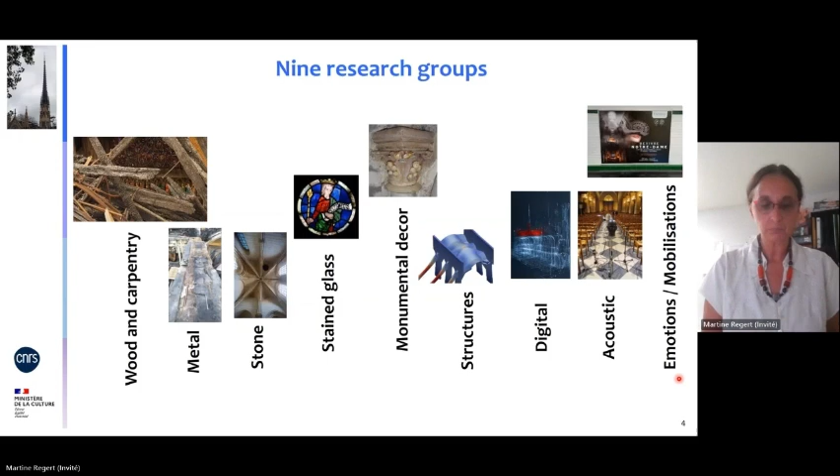After between 4 and 5 years of work, these groups have produced results that have shed light on various facets of the cathedral's history. This information was recently presented and discussed at a meeting held in Paris at the end of April.

Sorry, it's in French, but the title was Birth and Rebirth of a Cathedral, Notre-Dame de Paris, Under the Eyes of the Scientists.

We just had the information yesterday evening that this event is now available online, so you can attend the meeting online and follow the discussion and the debate and so on.

Of course, in a few minutes I could not talk of everything, but I will try to show you how the results of different working groups now converge to highlight some specific points of the cathedral, specific aspects of the cathedral. I will first talk about the chronological aspects.

Then I will deal with the supply of the different materials of the cathedral. And then I will turn to a subject that was perhaps not expected on such a cultural heritage topic: the case of information that we can gain from biological materials on environmental and climatic data. So I will highlight these 3 points in my presentation.

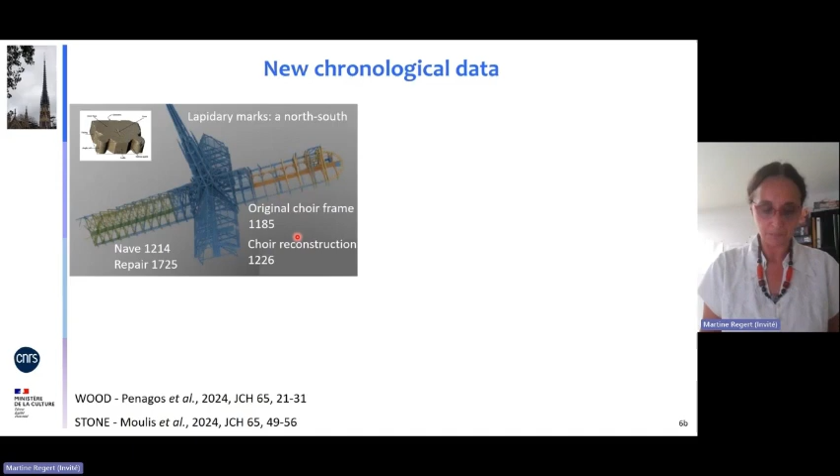The study of iron armatures or reinforcements used in the construction of the cathedral also offers a glimpse into the innovation that took place on this building site in the mid-12th century, adapting metal to create a novel architecture. Radiocarbon dating was carried out on the carved areas of some iron armatures, and they reveal that Notre-Dame is the first Gothic cathedral where iron was massively used as a proper construction material to bind stones together throughout the entire construction, leading to a better understanding of the master mason's thinking.

Even if research is still underway to establish a detailed chronology of the cathedral's construction, we can already see that data obtained on the various materials provides information on the dates and phases of construction, but also on the spatial organization of the site. Other series of wooden and metal elements are still being dated, and the study of the stained glass and monument decor, which I don't have time to detail here, will also complete this chronological overview.

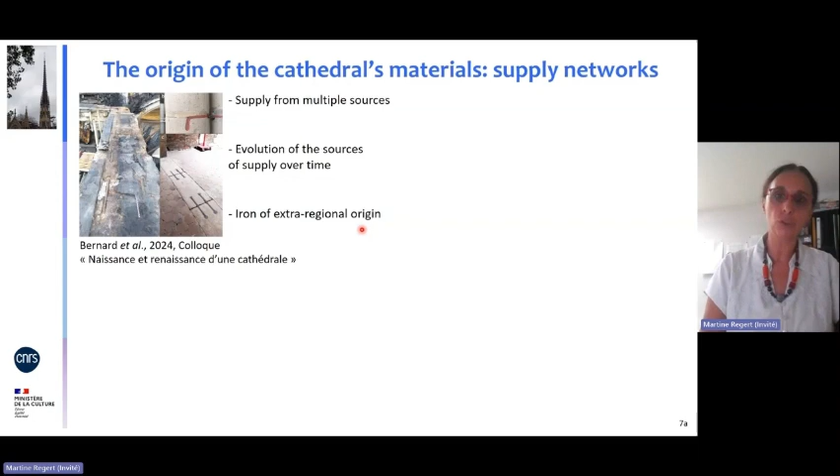We can also place the data obtained on this particular cathedral in the framework of other monumental buildings constructed during the Middle Ages. It has also been possible to show how the sources of supply evolved over time. Even if the sources have yet to be found, so there are still many things to do, the analysis clearly shows that the iron was not local but sourced from outside the region, which is a very new, important and interesting result.

For the stones, their geological identification was carried out, and it confirmed what was already known, that the stones were coming from local sources.

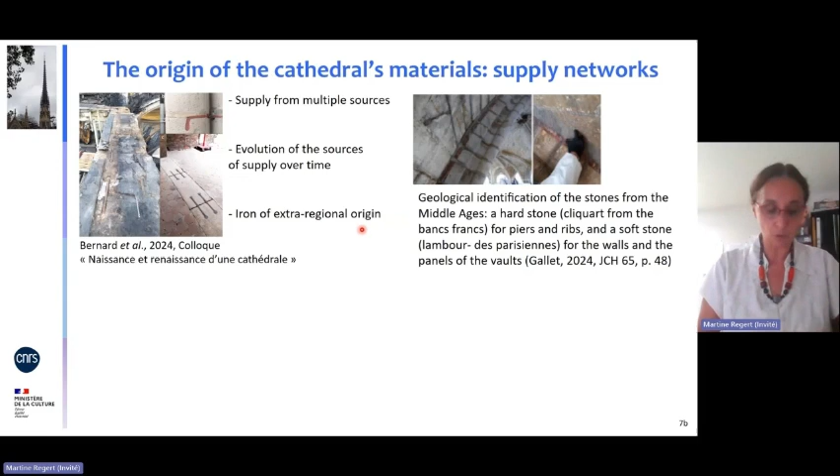Finally, we have hope to establish the origin of the oak wood that was used, and the working group on wood and carpentry is now building a dendro-provenance database to try to trace the forest from which the wood was obtained.

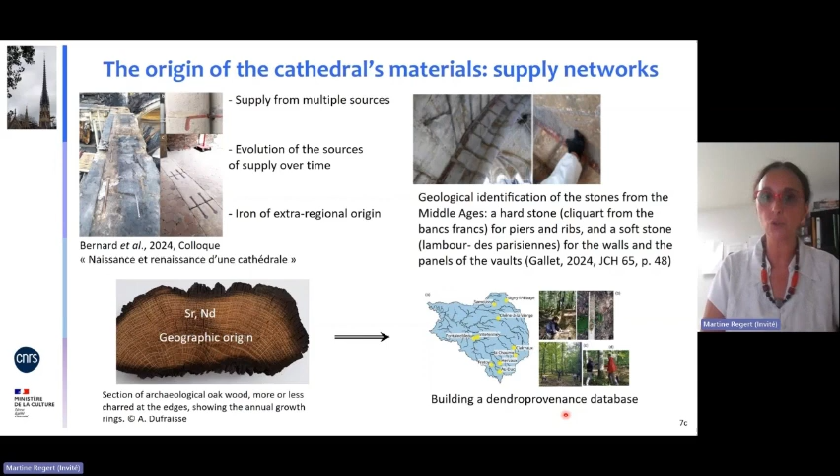You could see, if you look at the meeting that was held recently in Paris, that it now seems possible to trace the exact forest from which the wood came. This was a very challenging task using isotopic data to obtain this result, and it is also a new result of the scientific field.

The study of provenance is not the only facet of information that can be gleaned from wood. Wood is a wonderful material because it is a biological material, and it bears information on both environmental and climatic data, but also on the know-how of the artisans, the craftsmen and women.

Sorry, I'm a bit lost. I'm on 8A. Yeah, okay.

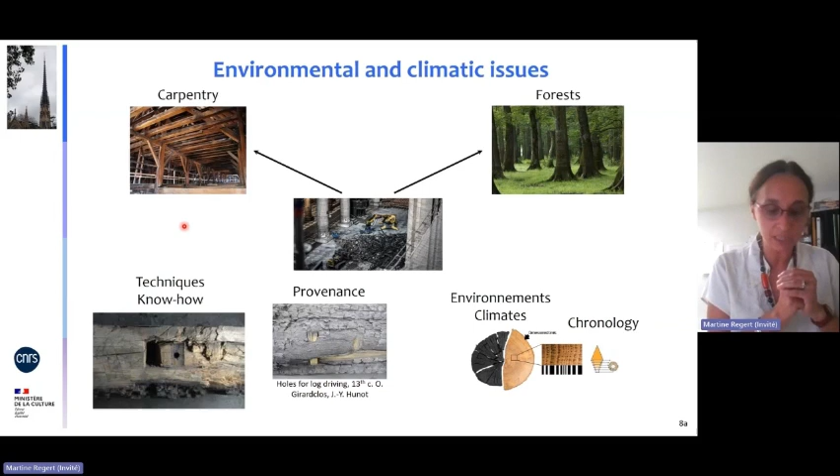Indeed, the wood in the history of the cathedral represents memories of the forest of oaks grown since the Middle Ages in the Paris basin, and in particular, the isotopic composition of the wood reveals past climates and can be considered as a clock of the past.

The study of wood also provides environmental and climatic data, as I already said, by combining information on the shape of the annual growth rings with their chemical composition.

It is possible to determine the size and age of trees, the density of forest stands, the type of silviculture, and information on the climate and its evolution over time. Furthermore, traces on the wood are also a source of information about how it was transported, as this hole here shows that some wood arrived by log driving on the river, on the Seine River.

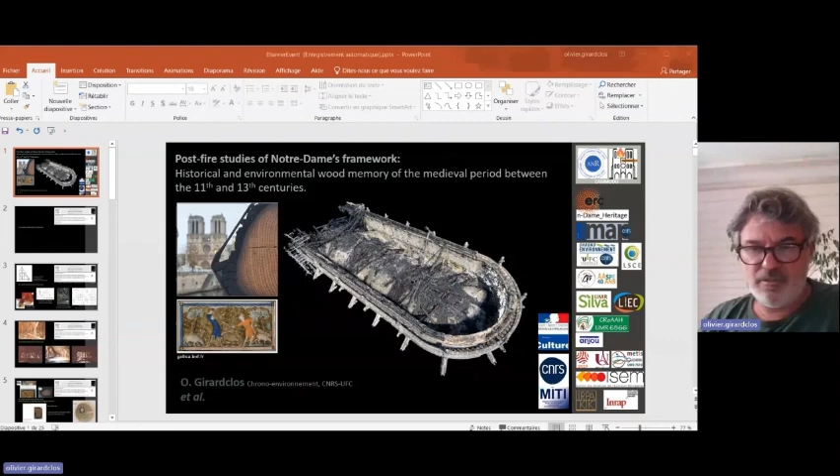Here is a good one. It's okay. Do you see my slide? I think you have not been. Now it's okay? It's okay. Do you hear me clearly? Oh. Maybe not. Do you hear me? I hope it's okay.

So first, I would like to thank you for giving me the opportunity to present our results here. I will say something similar to Martine, but in more detail, as she said at the end. The Notre-Dame de Paris wooden oak frame is one of the greatest masterpieces of Gothic carpentry in France. It was constructed between the 12th and 13th centuries, at a time of profound environmental and societal changes, climate optimum, strong demographic and economic growth,

which created significant pressure on available forest resources, one of the key economic drivers of medieval society. The objective of the Wood and Carpentry Working Group is to recover the maximum of information necessary to produce a multidisciplinary study of the disappeared wood frame and the wooden beams used to construct it. We obtained funding from the ANR, the project Quasimodo, to do this. These objectives are covered in detail in the paper in the special volume written by Alexa Dufraisse. As you've already noticed, I'm not Alexa Dufraisse, but I will try to give you an overview of the work

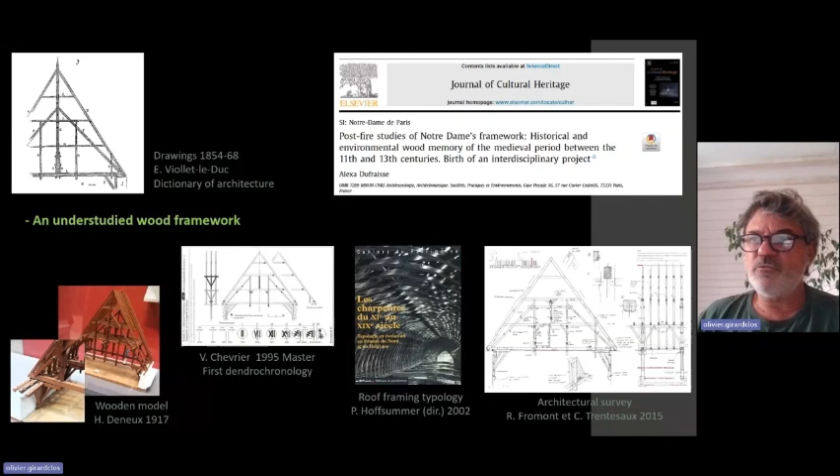Notre-Dame's framework design was included in a typology from northern France and Belgium, which clearly shows that innovation in frameworks was very important between 1150 and 1240. Finally, the architects Fromont and Trentesaux were the first to carry out systematic surveys of all trusses and timbers. But the study remained separate, and no interdisciplinary approach was put in place before the fire. In particular, the results of dendro dating were never cross-referenced with the surveys.

I can show you some photographs taken before the fire. Observed by layman eyes, this framework came across as a forest, because of the large number of beams required for its installation.

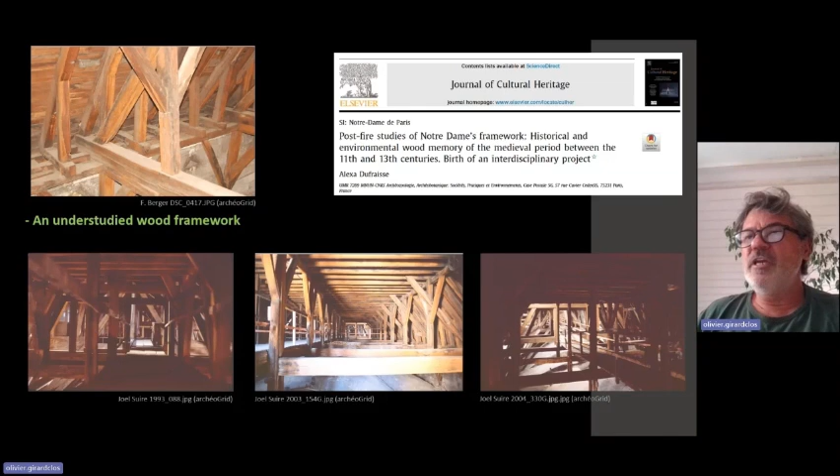A few days after the fire, my colleagues, who did the first dendrochronological dating, were among a very large number of scientists who reported that the remains of the fire contain information of great value for our knowledge of the building, and more broadly, of its construction period.

This is particularly true for the wooden remains that form the frameworks of the building, but which are also recorders of their environment. In fact, the trees that deliver the wood record in their growth the climate, the silviculture, and the harvest pressure. You can still see on these pictures that they provide an optimistic snapshot of the wood potential.

We have finally had to analyze much more restrictive examples, even though they are still very rich in information, as in this case of estimating the diameter of the log needed to shape the tie beams.

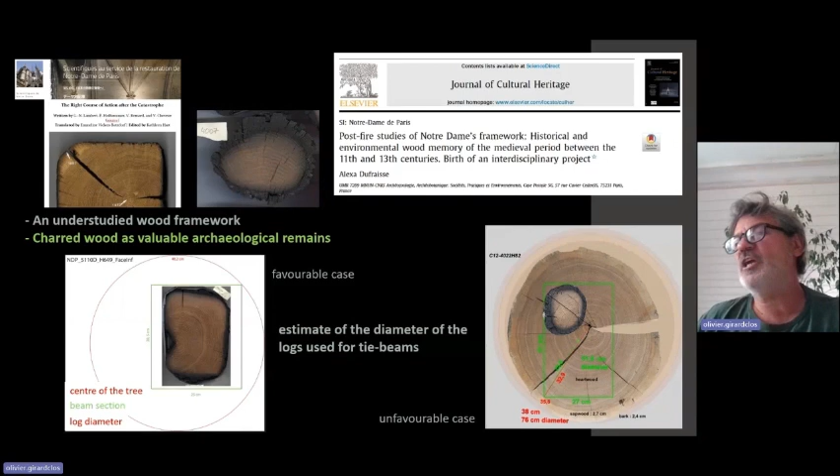The project of Notre-Dame oak wood frame study proposed four lines of research. The first is to study the timber and destroyed frameworks. The second consists of characterizing the forest stand exploited. And the third purpose is to define the climatic and socio-economic context.

Investigations for the fourth objective are on the hydromechanical properties of oak beams, to better understand the choice of use of oak in the Middle Ages.

To achieve this objective, the Wood Working Group brings together 70 people from a wide range of disciplines, from archaeologists to specialists in wood as a material.

But since the submission of articles with first results, I would like to share with you the progress made by the interdisciplinary work. We were able to collectively discuss the climatic context in the Middle Ages and develop results on the state and the dynamic of forest exploitation.

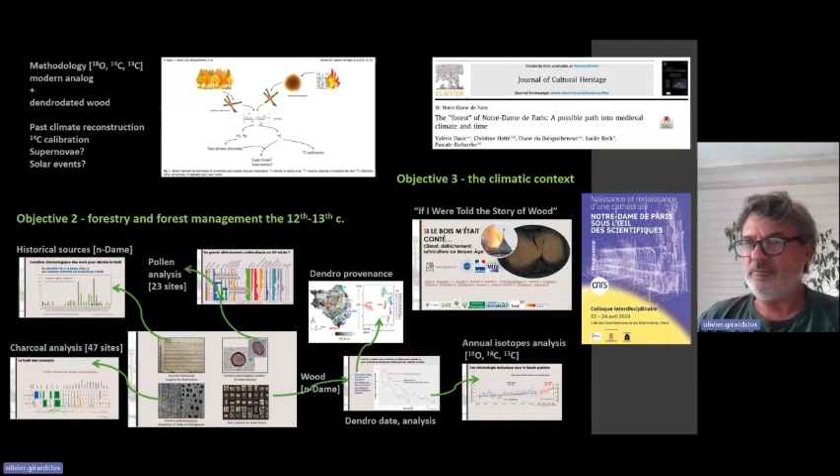These were achieved by characterizing the trees used in the frame, and starting annual resolution analysis after dendrochronological dating of wood, but also by exploiting historical sources and other environmental markers such as pollen and charcoal from archaeological and natural sites around Paris and Notre-Dame.

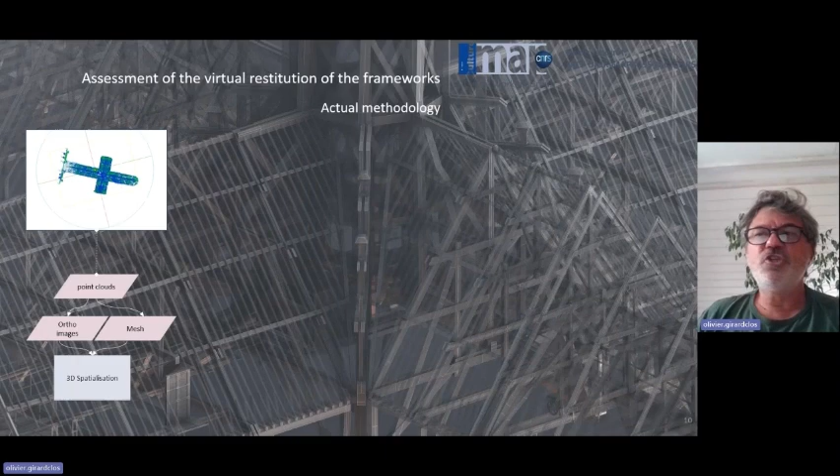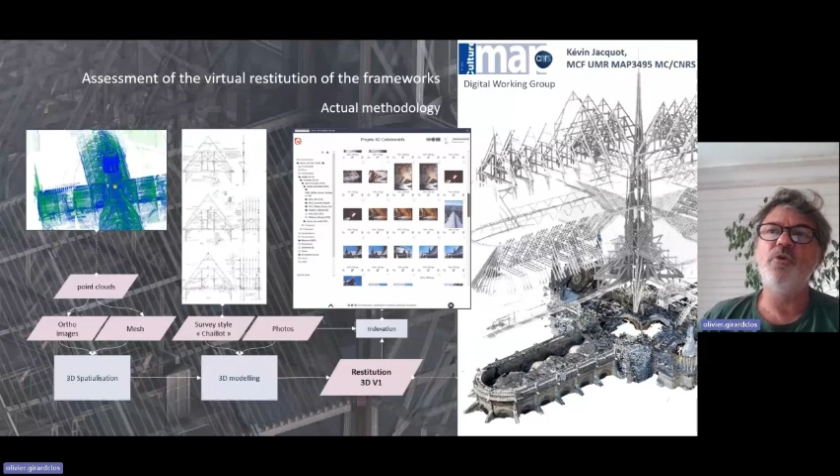Kévin Jacquot's work on the carpentry was decisive. I cannot tell you the detail, but he was able to use laser grammetric point clouds and Chaillot-style line drawings to build a three-dimensional model of the structure.

We have combined the three-dimensional representations with a controlled vocabulary for naming elements. It's well known to observers, but also to carpenters, that naming beams with a spatial nomenclature makes them easy to locate. We were also able to relocate the position of all dendrochronology cores in the model and reanalyze the dating data.

Finally, an important part of the special volume paper is to produce the first link between dendrochronological dates and surveys. This comparison was carried out by Frédéric Épaud on the basis of visual observations made from a large number of photographs. Since then, we have analyzed a fairly large number of remains, and major questions of interpretation have arisen.

Concerning the construction chronology of the choir, it's essential to update these results, which is rather useful after further analysis.

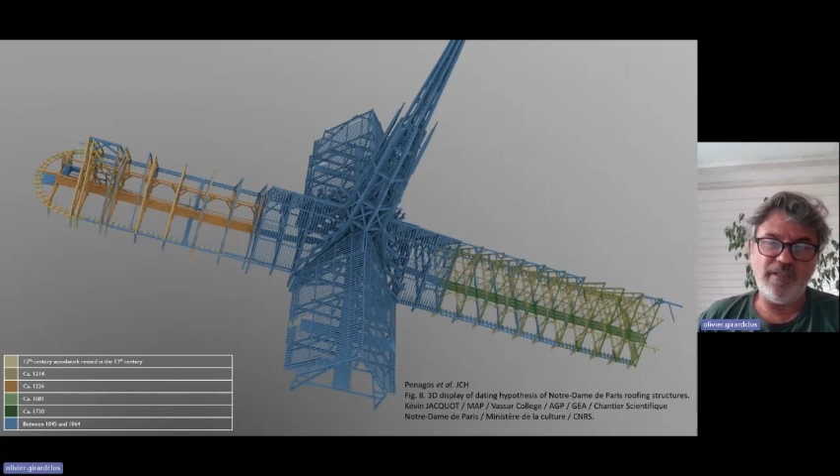The three-dimensional view of the roof structure can be compared with post-fire data, in this case directly on the remains of the timbers. Our daily work consists of making progress in the study, both directly and in the warehouse that the public establishment for the restoration has set aside for storage of the materials.

We now have accurate knowledge of between a third and a half of the total number of wooden items. Our study is based on over 300 precisely described pieces of wood. The most significant woods are photogrammetrically described. Since January 2022, 160 woods have been modeled using protocols constantly improved with the help of the digital group.

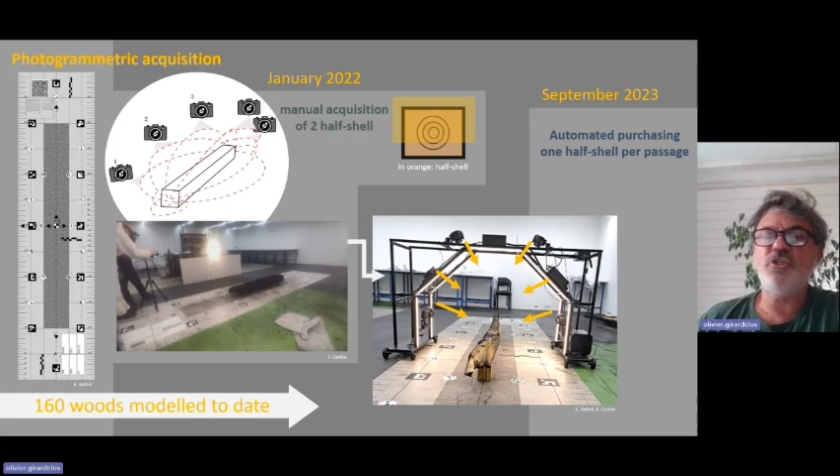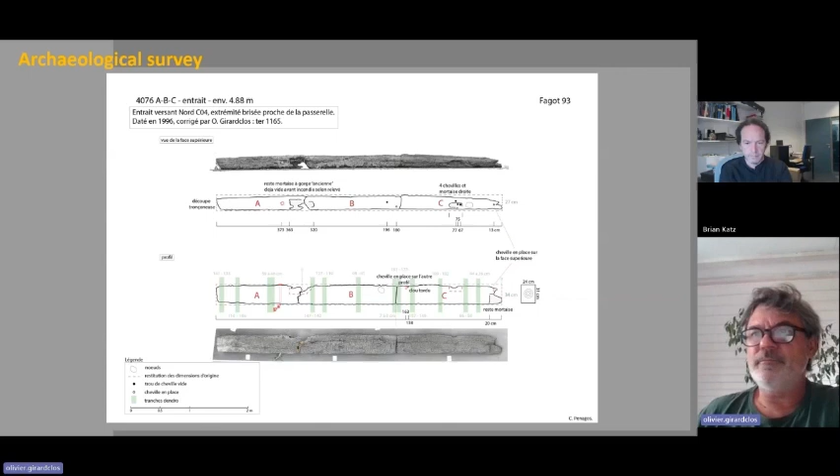Digitalization enables line drawings to be produced in a selected direction, providing information on paper and additional observations such as location of cuts, which are then studied in dendrochronology, wood mechanics, or chemistry. Digital models of the object are compared with various data sources in an attempt to relocate the remains within the framework before the fire.

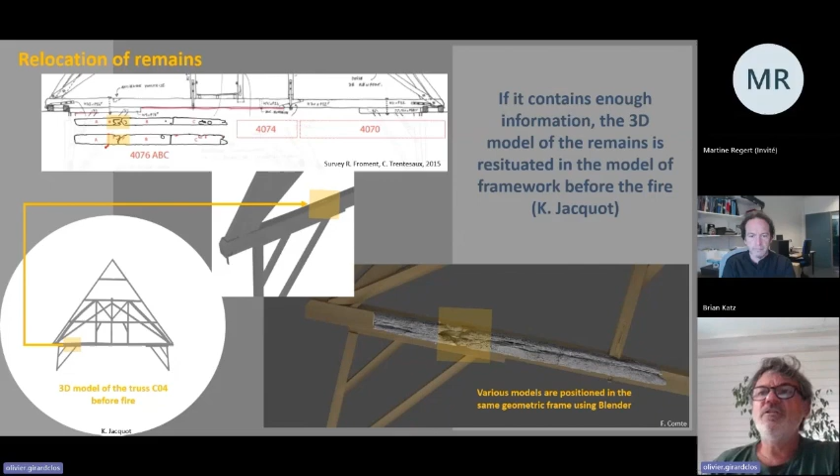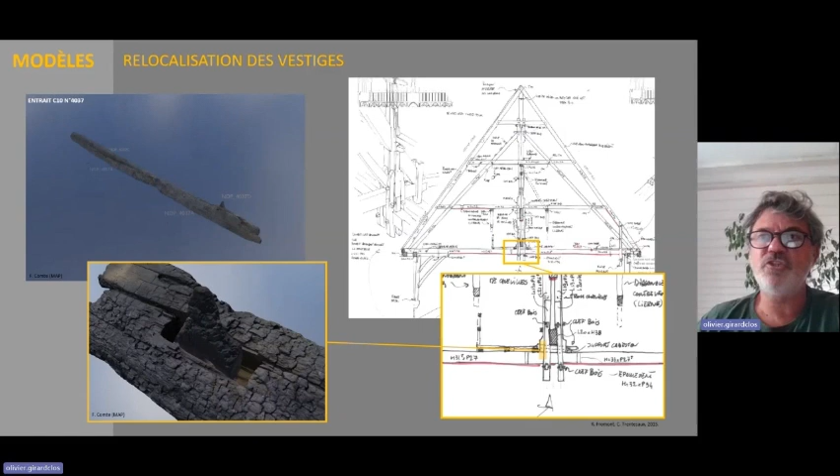Finally, the agreement of the relocation is also observed on the three-dimensional model of the frame. Digital modeling of the remains also makes it possible to understand details of the frameworks, such as these particular mortise and tenon joints, which were not visible before.

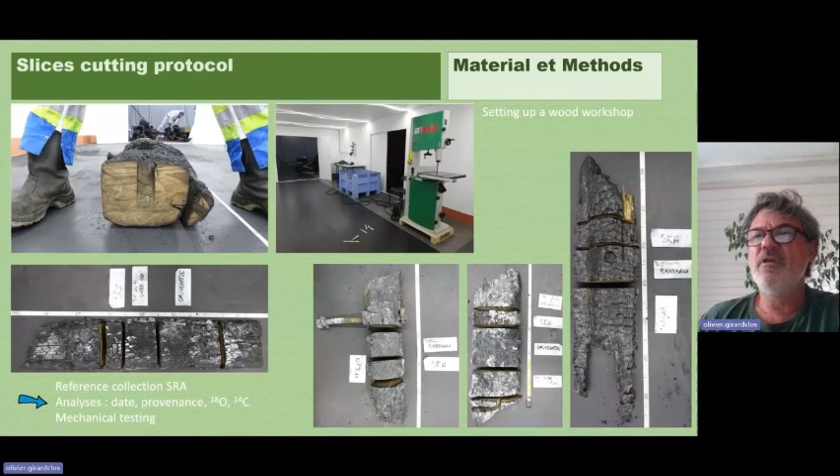Once all the dimensional and archaeological information has been recorded, several slices for collection and analysis are sampled in a dedicated workshop. We had to optimize the use of the tools for finishing the slices to observe the growth rings in the wood and charcoal in the shortest time possible.

Finally, slices have been sampled from more than 400 wooden items. Drawings have been analyzed on around 300, and more than 175 have been dendrochronology dated. This quantity shows that we have seized the opportunity, unfortunately offered by the fire, to work on a large number of woods from this masterpiece of frameworks.

Consequently, the chronological serialization of oak fellings was based on 40 tree-ring width series at the time of the article for the special volume, whereas today more than 200 are available. Most of the work that remains to be done is to connect the different information derived from analysis and descriptions, dimensional positioning in the roof, and archaeological facts at very different levels.

All I can say here on the results is that the choir frame was first built shortly after 1185, and rebuilt using most of the original wood around 1213, while the nave's framework was built around 1214, probably using wood from different origins, and modified at least twice, around 1230 and finally around 1290.

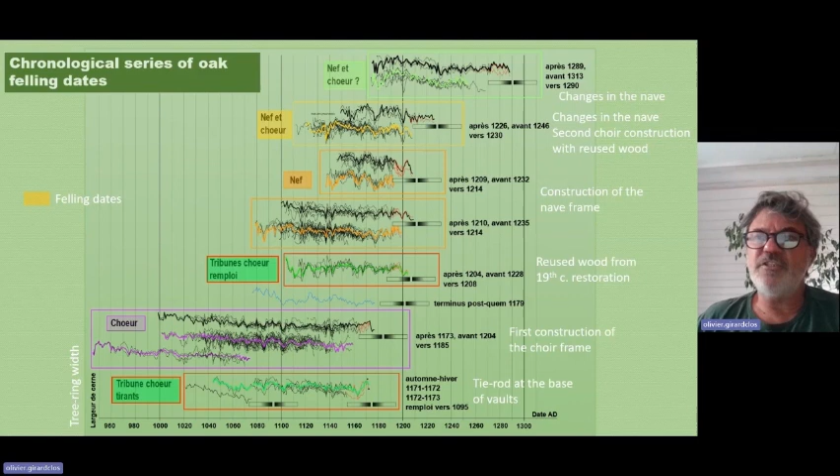In comparison, you can see it's not evidently similar from the journal version.

I didn't present the working groups before, so you understand that Olivier Girardclos was part of the working group on the wood, and then Frédéric will talk afterward on questions of structure in collaboration with other working groups. Brian Katz is part of the acoustics working group; he works at the CNRS too, and he will talk about the study and analysis of the sound environment, a subject of actuality at the Notre-Dame construction site between the 12th and 18th centuries.

Okay, let me quickly share. Make some noise if that doesn't work, otherwise I'll just start going. So I'm going to present an overview of some of the work that we've done on the acoustics, the soundscapes, and the intangible heritage of Notre-Dame in the context of the working group.

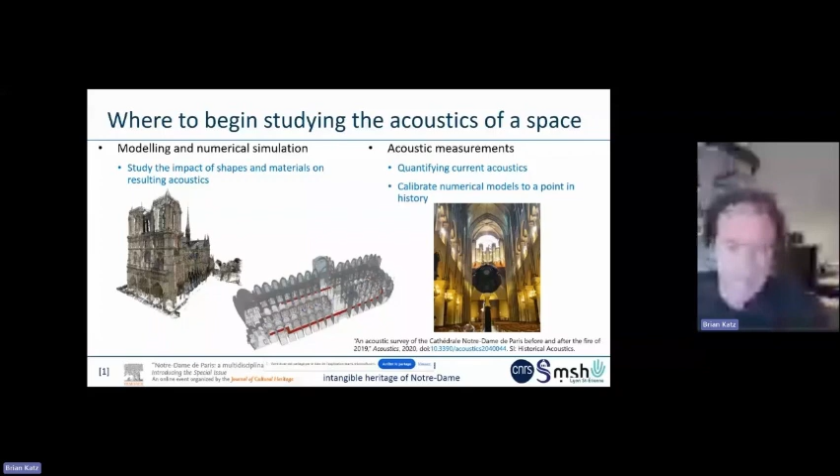So the first question is: where do we start when we look at the acoustics? We can look at acoustic measurements to quantify the state of acoustics at the moment. But we can also do modeling and numerical simulations to look at the impact of different specifics, and calibrate those models to get better results. One of the powers of computer simulations is that they're modifiable.

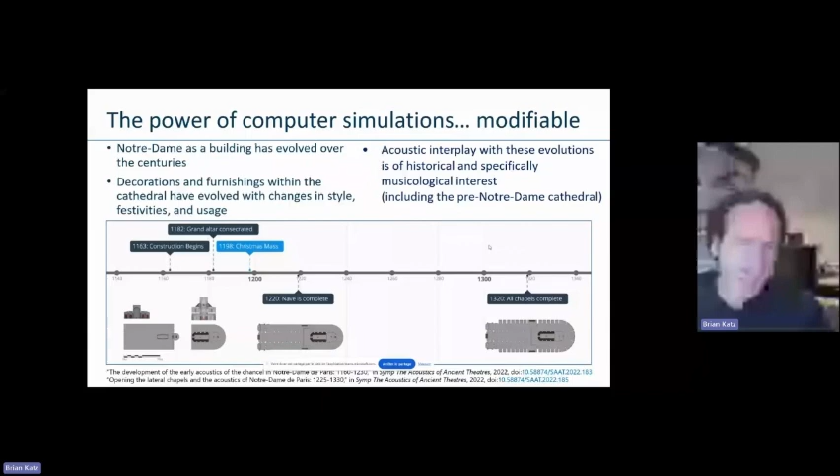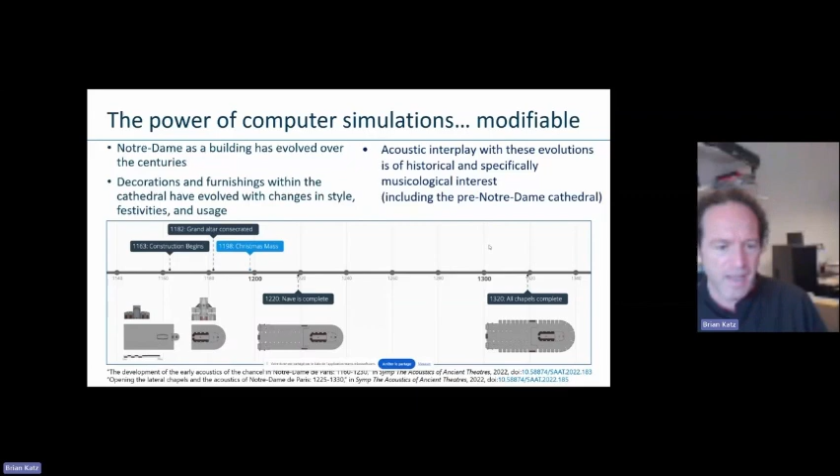So once we have a calibrated model, a digital twin of the acoustics of Notre-Dame before the fire, we're able to retroactively modify and study different times in the cathedral's history. We can see how the cathedral has evolved over centuries in terms of architecture, decorations and furnishings, and changes in the style of events and how it was used. We're interested in how the acoustics interplay with these evolutions, with a certain focus on musicology and how music evolved around and within Notre-Dame.

So the fundamental questions we have when we start using digital reconstructions are: can we trust the acoustic fidelity of the reconstruction? If I do a virtual measurement in the computer model, do I measure the same thing I'd get in the real space? That's our first level of validation. Then, do we trust the auditory fidelity of virtual reconstructions—do I hear the same thing in the virtual model as I would in the real one? And finally, can I create a convincing immersive environment where I actually feel like I'm in the space?

So do I react the same way in the virtual reality version, which is kind of our measure of ecological validity? A couple of studies we've done focus on singing in the different acoustics of Notre-Dame over history. We developed an interactive singing model so we can have 4 singers singing together in a sound-free space, but at the same time they're actually singing in the acoustics of Notre-Dame that we can change dynamically.

We're looking at the analysis of their behavior, their performance style, with questionnaires to look at whether the evolution of the school of Notre-Dame's polyphonic music is linked to, or works better in, certain acoustics and certain dates than others. And we spent a lot of time trying to recreate a realistic version of this.

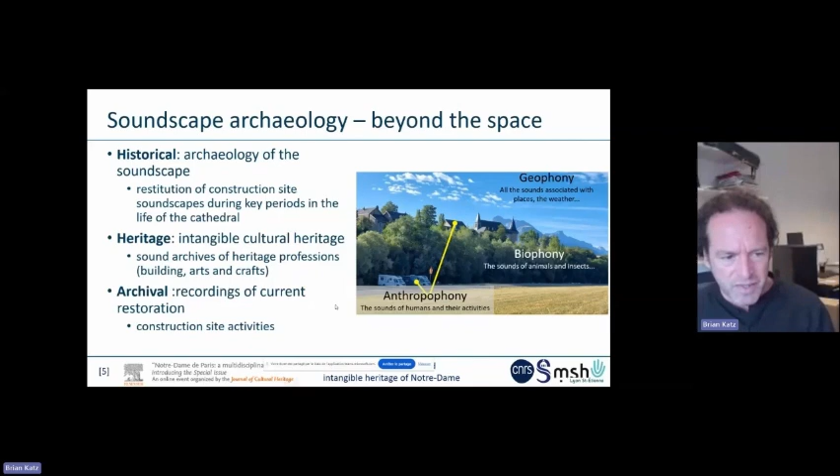If we look at the second major aspect we look at in the acoustics group, it's the soundscape archaeology—going beyond just the architecture of the space, looking at the historical aspects of the soundscape, trying to reconstruct, for example, the work site of Notre-Dame at different periods, going through sound archives of various elements, focusing here on the construction workers and how artisans have used sound over history while building, and also documenting what's happening on the current construction site for archival purposes, to better understand the construction activities of today.

The basic procedures we look at: we go into any kind of documentation on how things sounded, both written and visual, when we're looking at something before the time of recordings—any documentary evidence, discussions of what things sounded like, how information has been passed on over time from word of mouth among artisans. Then we try to identify and capture corresponding sonic elements today that would represent what's happening in the past, and propose plausible virtual reconstructions by assembling those elements into a virtual environment.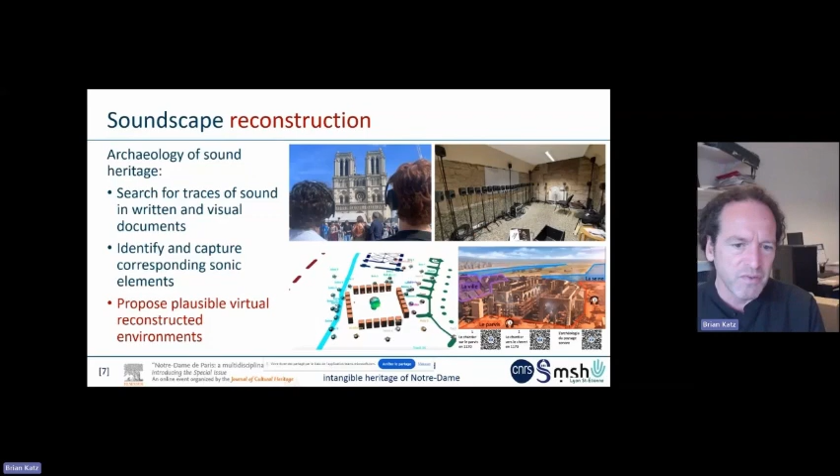In this special issue, we published 3 articles looking at the reconstruction of the sound environments, looking at voices of children in Notre-Dame—the children's choir and how it evolved in the Middle Ages and how it would compare to today.

And in collaboration with the Emotion and Mobilization Working Group, we worked on an inquiry with a number of questionnaires and interviews into how people remembered the acoustics of Notre-Dame before the fire, and how that has evolved over the years, by interviewing people who have been involved with Notre-Dame for quite a number of decades.

I want to point to another aspect, which is how we look at research communication for a project of this nature, like Notre-Dame. We know that conferences can be engaging, like what we're doing here, but they're limited in public attendance and also in technical capabilities for spatial audio.

So what we're doing is really creating these immersive environments. As we see with the system today, we can only present mono audio, so you can't create the 3D immersive reconstructions over headphones, and you definitely can't create the multi-loudspeaker kind of systems.

Journal publications are good for scientific results, but again are very directed to a specialized audience and not good for communicating with the public. So we looked at how to explore new possibilities for sharing our research with the general public—the idea is really to go from research to outreach. The research team identified a number of key scientific results we want to communicate, and then we worked with content creators to develop scenarios or concepts, giving them as much artistic freedom as possible under the constraints of actually presenting those results either directly or indirectly.

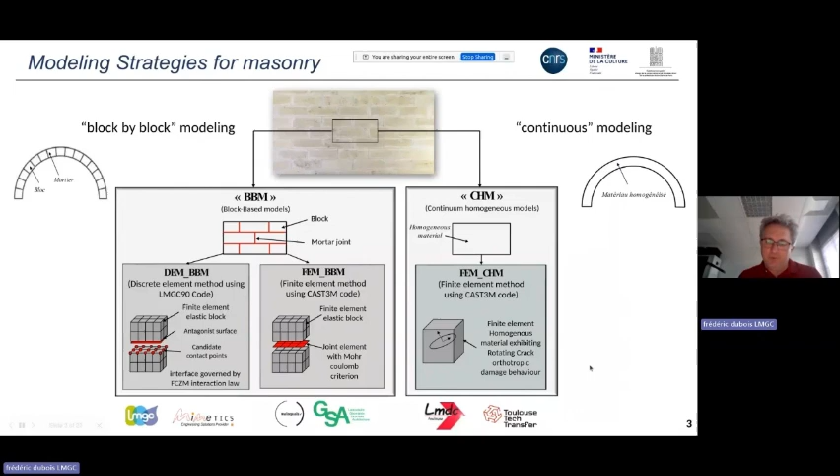After that, what we have to do is build a geometrical model. This was complicated because we don't have anything when we start to study the cathedral. So we start from the point cloud made by Andrew Tallon, and using this, working with people from the MAP laboratory and a small company, Stono, we made a model.

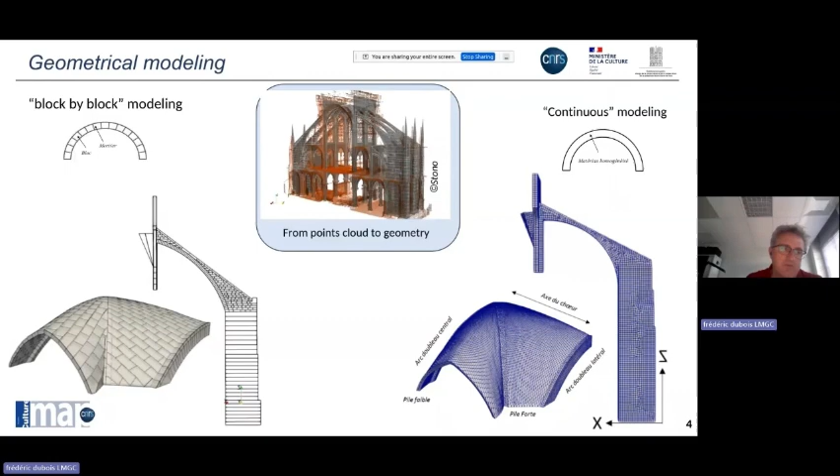Depending on what we need, we made either a continuous model, so you have a continuous part for the vaults and a continuous part for the block dressing, or we made a block-by-block description, which is more complicated to describe the structure. It was an iterative process, and at the end we did some computation with a simple model, then we enriched the model.

We also did some structural tests on some structures, for example compression, shear of walls, and things like that. At the beginning, when we didn't have any information on the material property, we tried to use this as an equivalent material.

Progressively, we were able to do some measurements in the cathedral, for example using sound velocity and using some kind of correlation between this sound velocity and the mechanical properties. After that, iteratively, once more, we updated our model to have more relevant solutions.

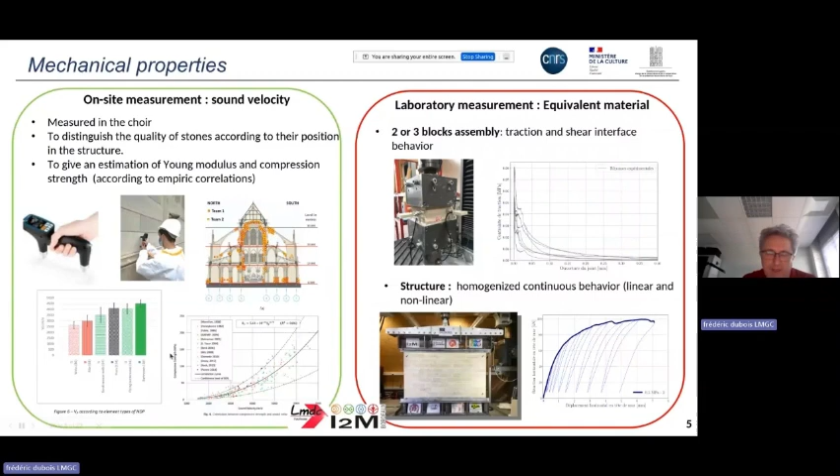Okay, I'll go on, and if you have any questions, I can answer after. What I will show you today is first, how the original structure was working, what was the impact of the fire. I won't show a lot of things, but I'll show some results, and the work in progress we currently have.

First of all, we were not able to compute the entire cathedral, it's too huge. So we just considered a slice of the cathedral. It was a 3D model, and in that slice we have a vault, we have walls, we have piers, and we have a buttress.

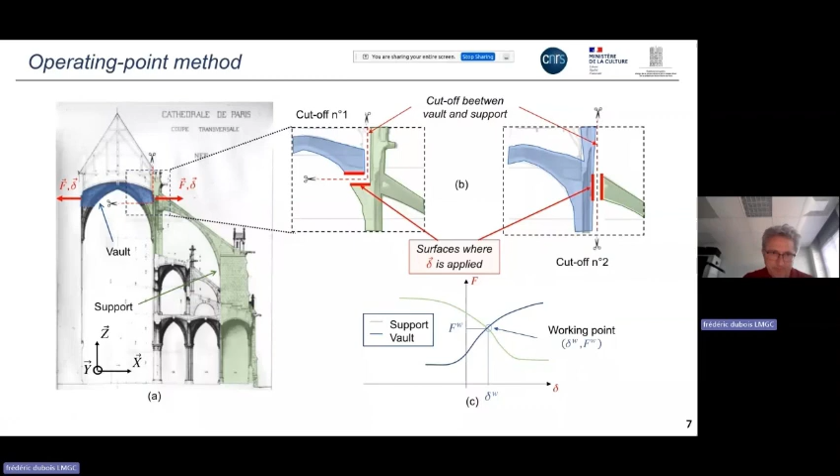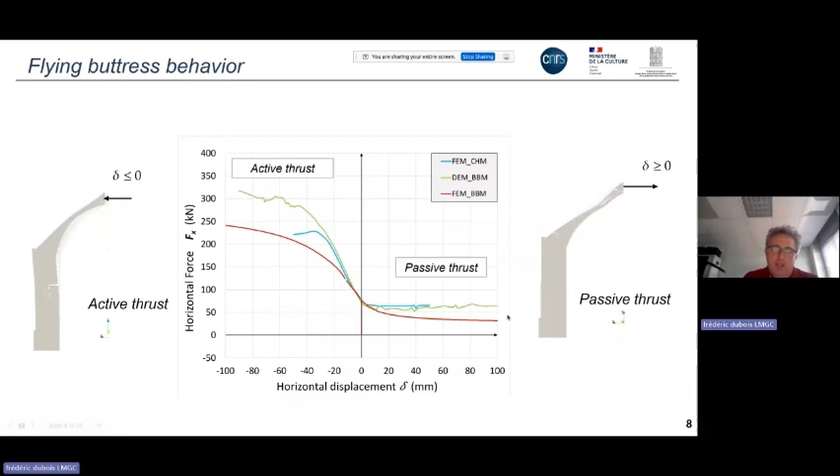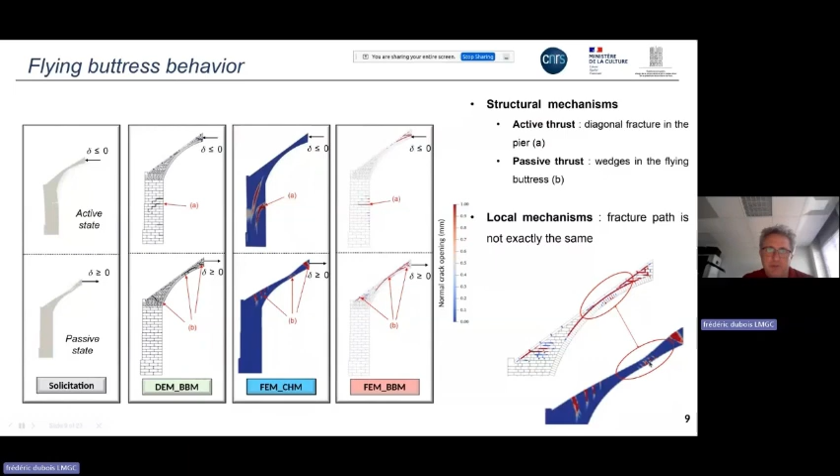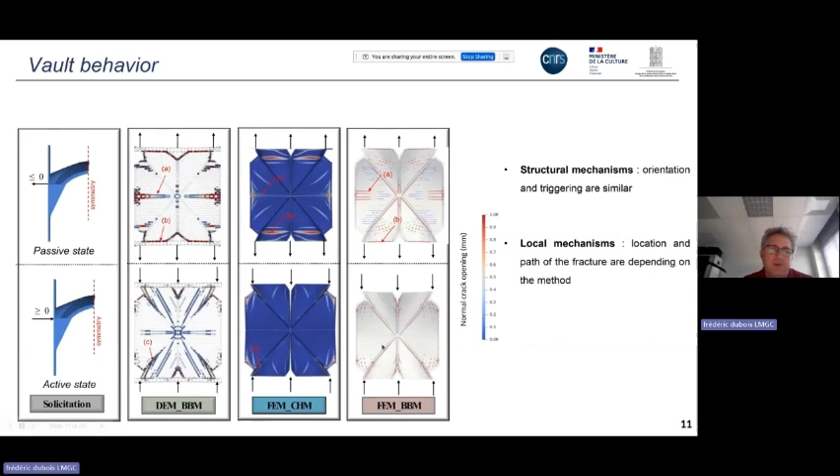And if we look at the damages in the structure, we see that once more, the orientation—in fact the triggering of the damage—is the same. Some paths are a little bit different, but it's quite similar anyway.

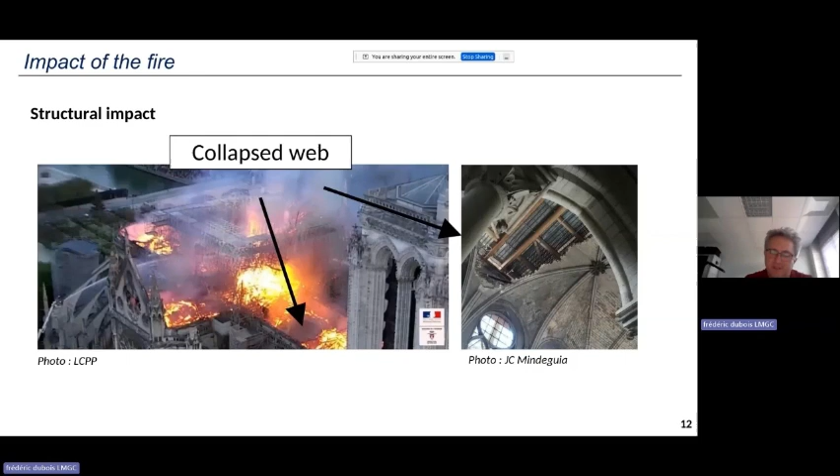Now, if we want to take into account the impact of the fire, we have deep impacts like the collapse of the web, but we also have some impact due to the material change. We were more interested in this effect of the change in the properties of the materials.

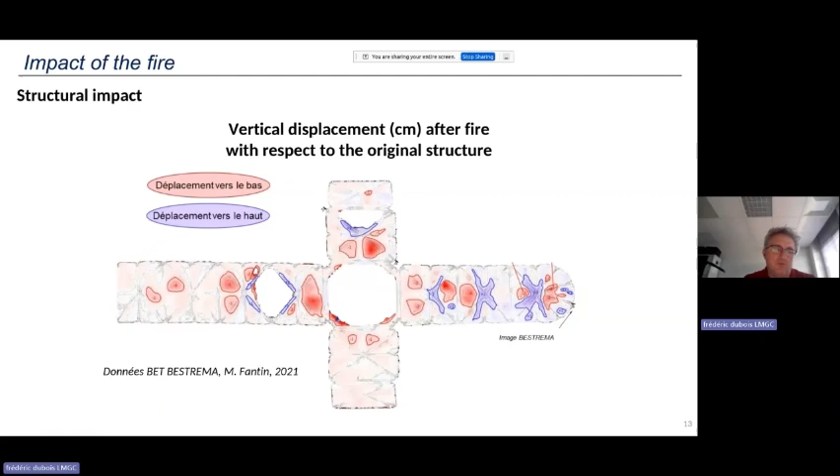What was observed doing some comparison of the point clouds before the fire and after the fire is that part of the structure has moved. Also, what you see, for example, on this vault, is that the center of the vault—the displacement is increasing, so it's plus 2 centimeters here, and decreasing elsewhere. On the web, it's minus 5 centimeters. So the idea was, are we able to recover this kind of phenomenon?

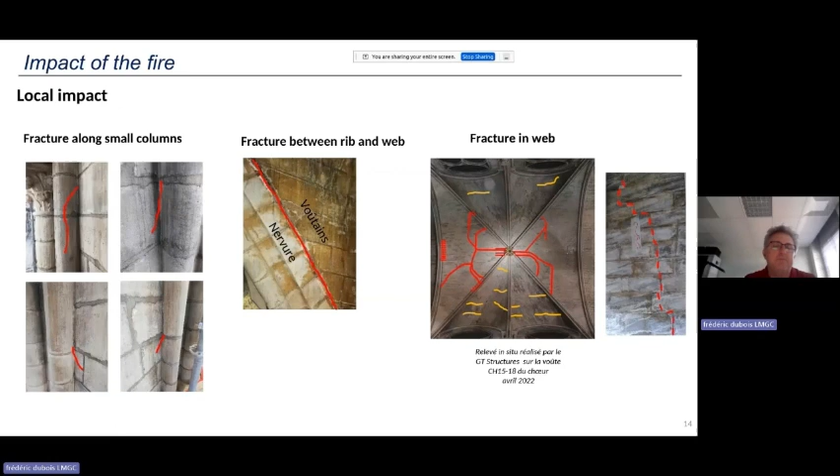Another thing was that we observed a lot of fractures, so we don't know if these fractures were there before the fire or if they are a consequence of the fire. But anyway, we also observe some fractures in the columns between the rib and the web, in the web, and so on. Probably we won't be able to observe all the fractures.

So what we did is take the material and the geometry, as I showed you before, and create this model. What we need to add is some information concerning the temperature of the stone. We did some experiments in the lab and observed that for limestone, the color changes with the temperature. So we made a kind of map between this color we can measure on the structure and the temperature applied on the stone. Using this, we define a scenario concerning the temperature due to the fire on the stone, and we start doing some computations.

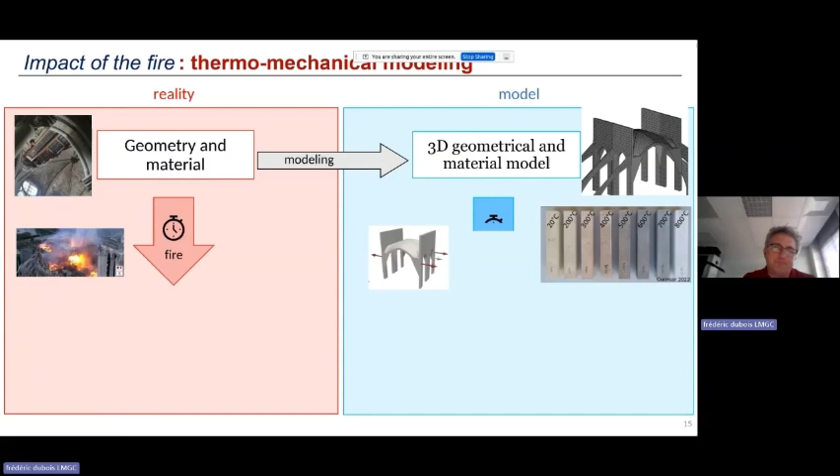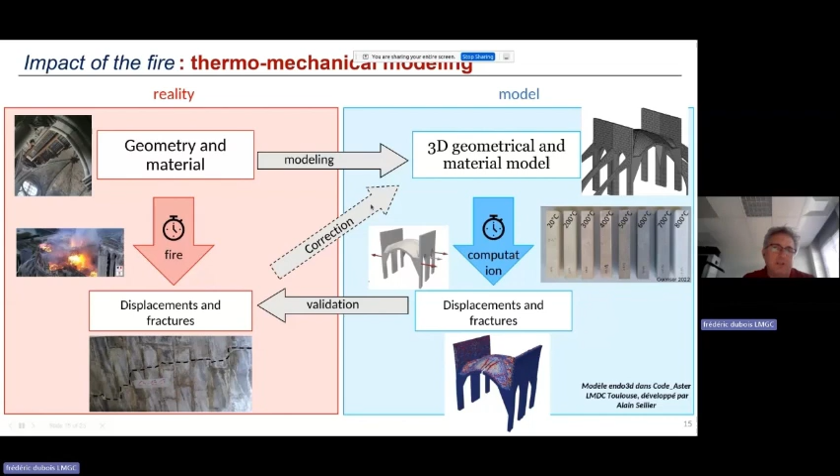At the end, what we want to do is compare the displacement and the fracture in our model. This, for example, is the damage computed using the software developed in the model developed in Toulouse. After that, we can try to validate the hypothesis, and eventually we try to do some correction of the model.

After that, concerning this motion of the vaults, we recover something which is similar. You have a positive vertical displacement at the center, and after that you have some part with a negative displacement, and they are in the same order of magnitude. We recover this X shape.

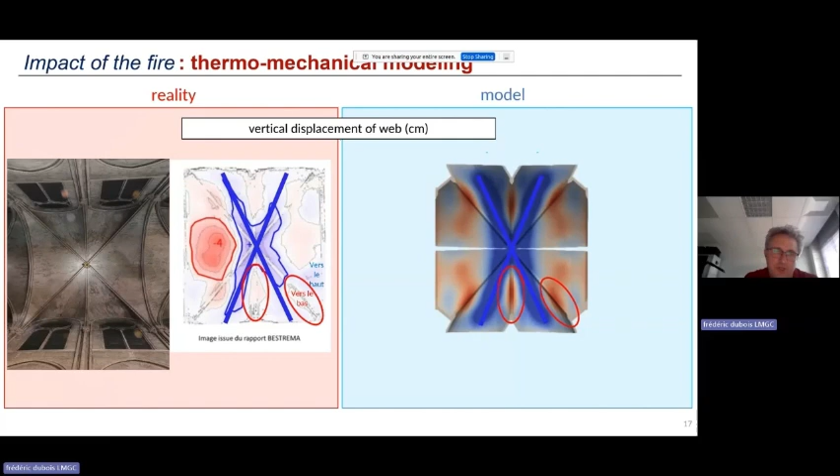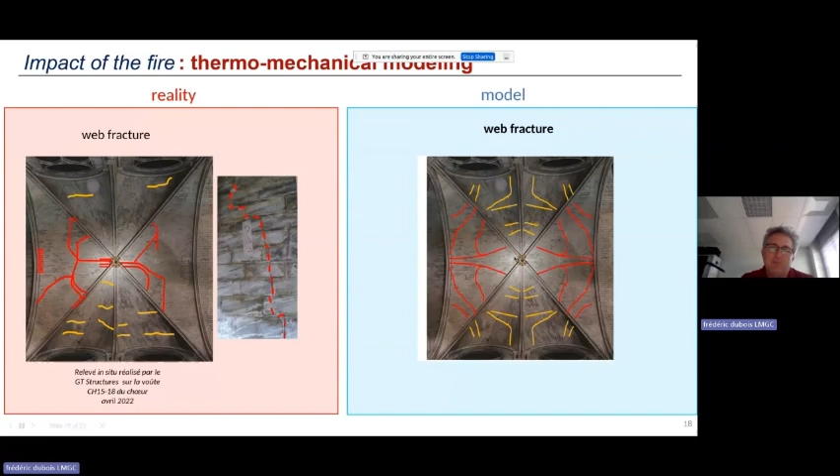Concerning the fractures, the numerical model gives you a lot of information, but you can try to identify the main fractures and compare them with what you observe in situ. What you observe is that the pattern is symmetric, due to the way we compute things. But anyway, we recover something which seems quite similar.

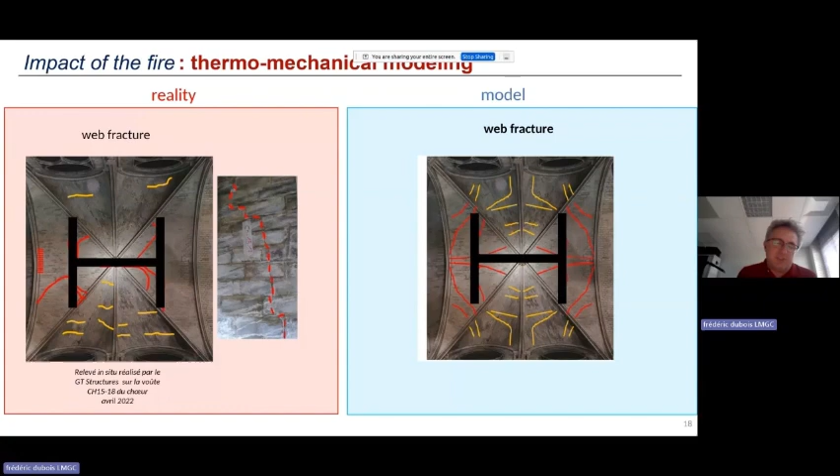So now I will finish. This was a short presentation of all the things we did. So if you have questions or if you are interested, please contact us and we can give you some papers and things like that.

What we are doing now is just to see the influence of the wood and the steel framework. Olivier showed you the work they did on the frame. So now we took this information on the naming of the parts and the mechanical parameters, trying also to have information on the joints between the different parts. We are doing things around that, and we try to couple this model we did with the masonry part, and we try also to add all this steel staple you have in the structure, which was for us something we didn't know at the beginning.

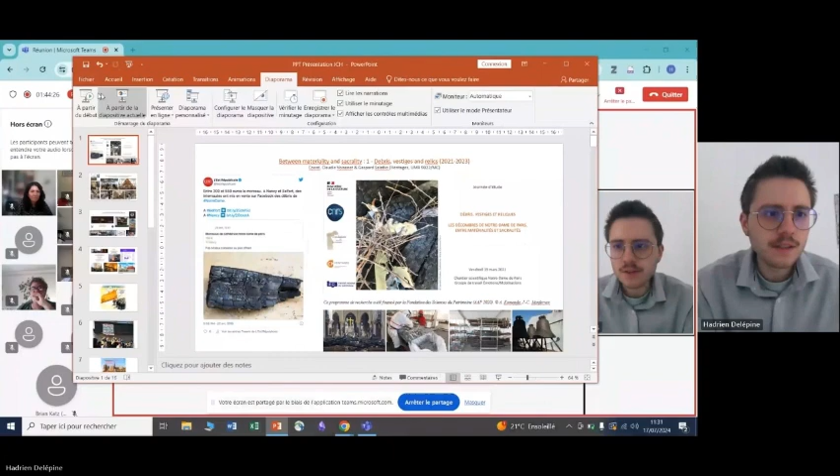So, I think you are seeing my screen. Yes, we are. Great.

So the first involves observing and analyzing the actions and words of the different collectives working on the site to understand how the exceptional nature of the place has influenced the treatment of materials on site, attempting to identify the registers of sacrality employed, whether secular or religious.

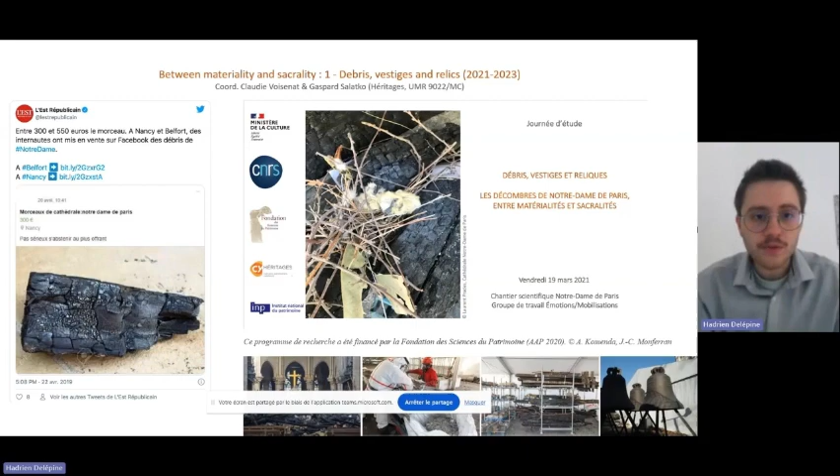This includes the debris elevated to the status of remains, which have been sorted, classified, and preserved while being the object of public appropriation desires, considering them as quasi-relics. Also, the stone and wood structures intended for reconstruction, treated with a form of exceptionality aligning with the grandeur of their destination.

The use and highlighting of exceptional skills play an important role in this metabolization by the monument of the new materials that comprise it. The second approach focuses more on narratives.

These include individual accounts of the emotions felt during the fire and how personal biographies connected to the grand history of the monument, memories of the restoration site, both personal and collective, as an exceptional moment, a unique experience that is both exhilarating and exhausting.

And also the mediations that tell the story of Notre-Dame, multiplied since the site's closure, some of them constructing in words and images the epic of the restoration.

This ongoing story of the site under construction must be put into a long-term perspective, from the hagiographic deeds of the Middle Ages to their secular transposition in the 19th century, when the exaltation of the nation replaces that of faith.

The third approach comparatively examines the notion of heritage catastrophe, varying cases, countries, cultures, scales, and natures of the concerned heritage. The results, perfectly resonant with the case of Notre-Dame, show that heritage indeed constitutes a distinct symbolic class within the material world of humans.

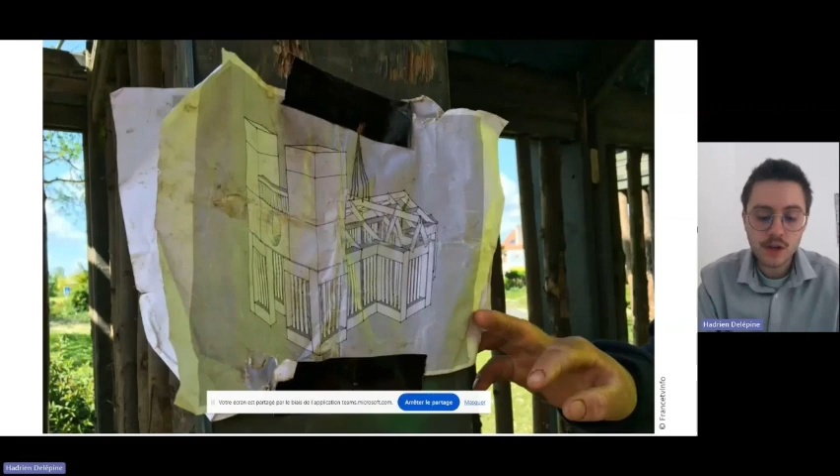Quickly removed by the authorities, these transitionary monuments allow the Yellow Vests to reverse the image of 'breakers' applied to them and to claim to be the 'people of builders' that Macron praised at Notre-Dame but scorns on the roundabouts.

From then on, very openly, the reconstruction of Notre-Dame de Paris became part of a political agenda that sometimes collided with the technical imperatives of the restoration project. Meeting the 5-year deadline imposed without consultation by presidential will became the evidence of the presidential ability to keep his promises.

Everything became politically significant, whether it was the exceptional nature of the worksite, characterized by the complexity induced by the simultaneous presence of trades that normally work sequentially, or the implementation of traditional know-how revisited by the demands of a timing characteristic of modernity and its tyranny of speed.

The lots of the calls for tenders were divided in such a way as to allow the largest number of companies to respond, while great attention was also paid to their distribution across the country. Similarly, the oaks intended for the framework came from all regions of France, considerably complicating logistics but embodying the idea that the cathedral represents the nation, its excellence, and its resilience. The whole worksite finally became a symbol.

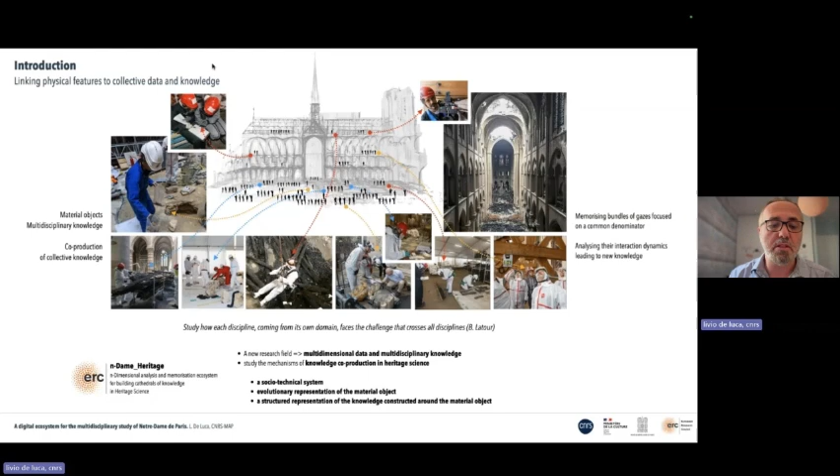Our ERC-funded project, which is part of the Digital Data Working Group until 2027, aims to build a new research matter and a new research field. We are creating a digital ecosystem that combines the evolving representation of Notre-Dame Cathedral with the collection of data and multidisciplinary knowledge generated around it.

Our methodology consists of two main research phases. The first focuses on creating semantically rich data by documenting the journey from the researcher's questions to data production and knowledge creation and interpretation. This involves tracking each step in the process, such as data collection, element selection, the study of relevant features, and the digital and physical reconstruction of the arch, as an example.

This consists of adding information to the data that traces the data producer's contributions to build this collective knowledge. This integration forms a semantic layer that represents the knowledge within the data.

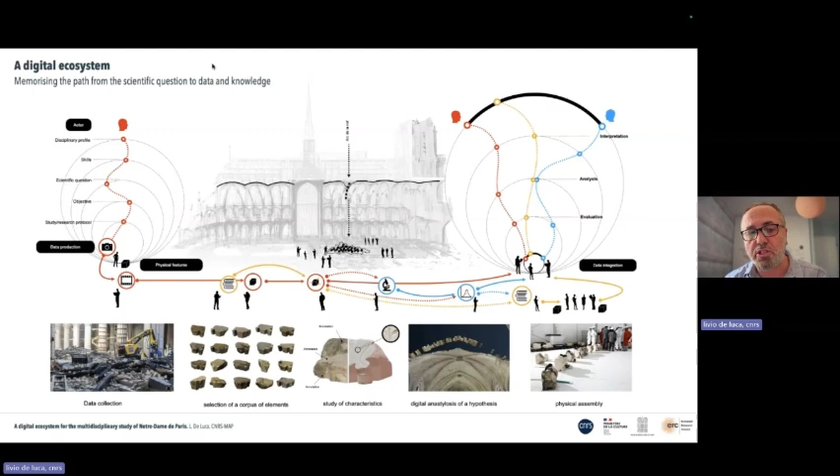The second phase focuses on analyzing the produced data by linking multiple representations of the same material object through digital versions and through several temporal states of the cathedral. For example, a 3D model of a beam used for mechanical studies can be connected to the historical survey drawing and analyzed before and after the fire, including the wood provenance and dating as presented before.

This phase of our research aims to explore the intersections of several disciplinary perspectives by studying the relationships between the material and the knowledge objects. The digital dimension enables us to navigate through several dimensions of the form - the shapes, the space, the time - and the knowledge perspectives, reaching several fields of knowledge.

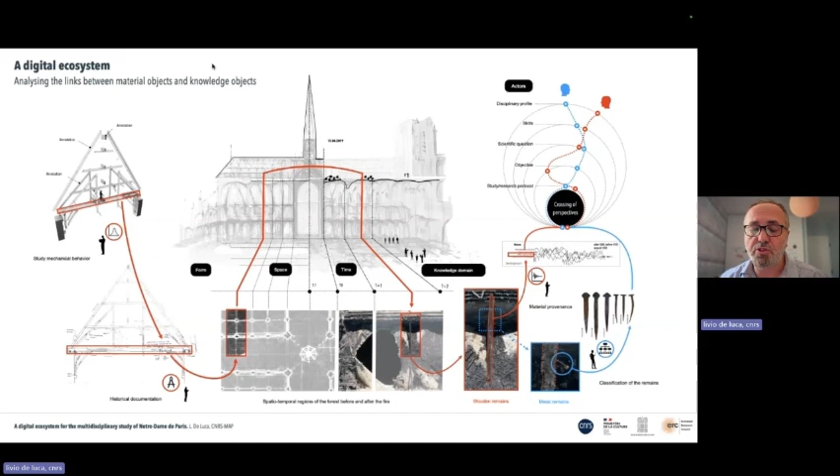These scientific and methodological challenges are discussed in the first of the four digital data articles in the special issue.

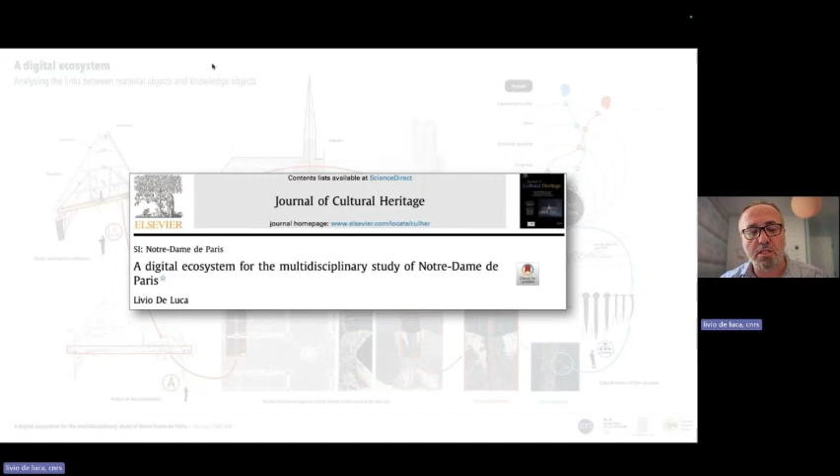Since 2019, our working group has been building a software platform based on web technologies to centralize, enrich, and spatialize heterogeneous data by federating various French and international research actors focused on heritage digitization. The goal was to integrate open and reusable software from different laboratories into a common ecosystem that manages the entire data life cycle.

This includes data ingestion, visualization in multiple dimensions on the web in 2D, 3D, and 4D, and several stages of semantic enrichment through metadata schemas, controlled vocabularies, and semantic annotation. This foundational work has facilitated data circulation among stakeholders and enabled laboratories as well as actors belonging to the restoration worksite to explore interoperability issues and enhance software functionalities for building a unified framework.

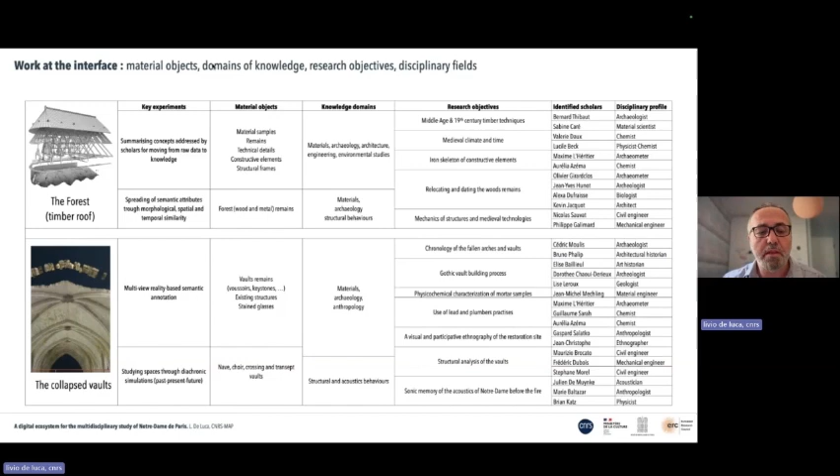By linking data to its context, we ensure the generated knowledge is comprehensive and nuanced, reflecting the complexity of Notre-Dame's restoration and the multidisciplinary study context. To give an example, the timber frames.

It is also linked to the survey of the charred timber remains recovered on the extrados of the vaults. The same model, which has been provided to architects for the restoration project, is also used, as mentioned by Olivier, by the wood and carpentry working group to identify and digitize elements that they are studying. The hypothetical reconstruction is employed to verify the potential location of elements within the original structure.

This helps confirm or refute hypotheses about the remains' identification and precisely locate the dendrochronological data.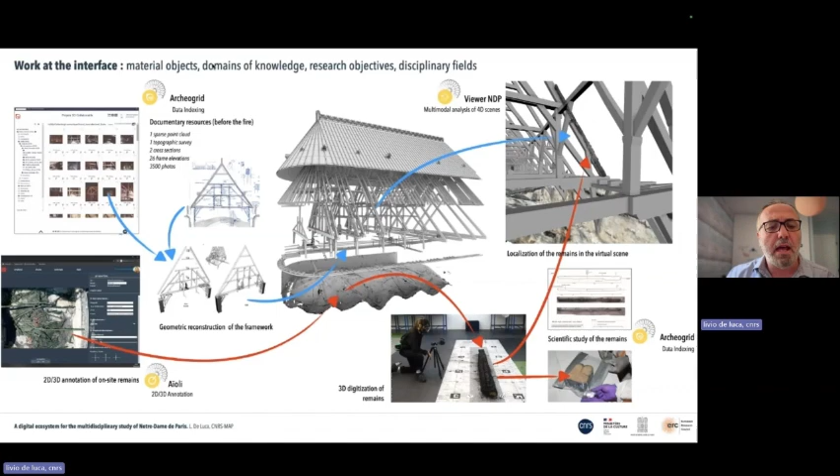So you can easily see what is the cross-cutting role and position of all these interconnected data into the entire human adventure. Now let's follow the path from the material objects to the multiple objects of knowledge.

The first challenge for us was the transition from the material object to the digital representation of it. This involved not just surveying to digitize the cathedral, but creating a framework to integrate multiple scans at various scales and temporal states.

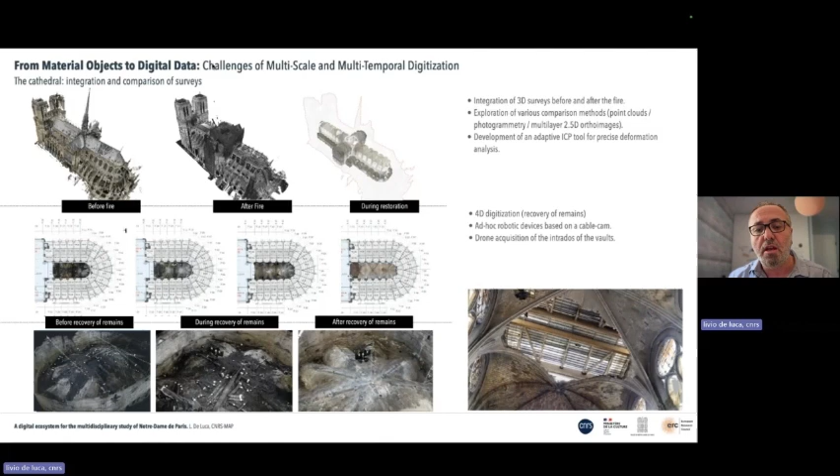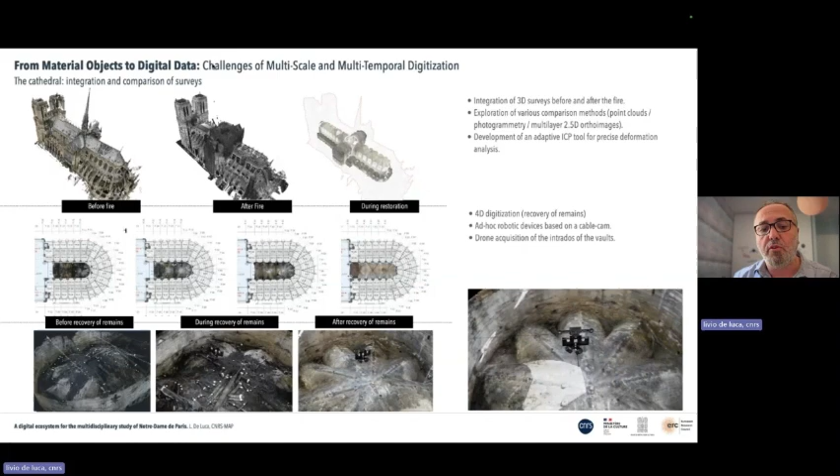An initial key contribution was establishing a robust alignment strategy for comparing these different temporal states. For instance, we provided a metric comparison of the vault's condition before and after the fire, aiding in studying the structural deformation. Additionally, as shown in the video at the bottom right, we monitored the remains recovery operations using a custom device based on a cable cam to create a four-dimensional cartographic support for locating all the elements.

Both experiences are presented as articles in the journal special issue.

Another fundamental aspect of our approach is the transition from the digital representation to the multidisciplinary knowledge. This involves integrating several interpretative layers coming from researchers within the digitization of material objects.

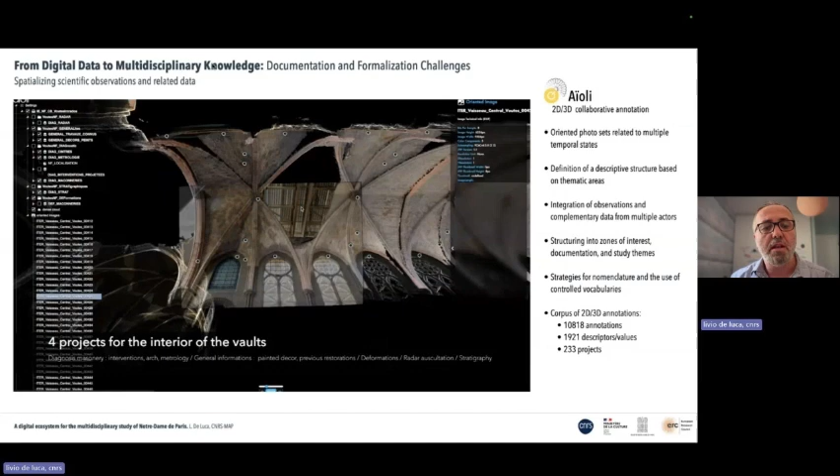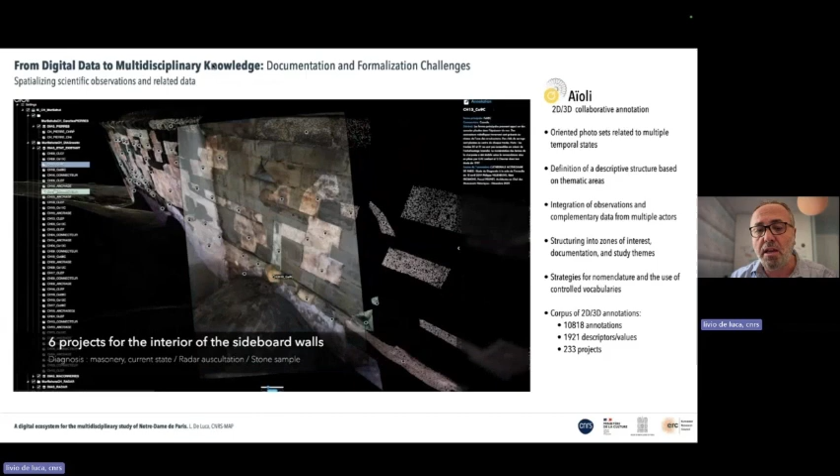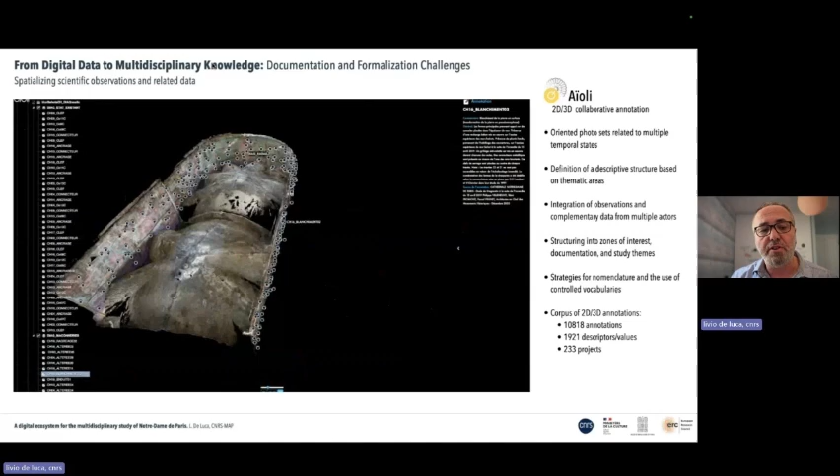We conducted very large-scale experiments with a 2D and 3D annotation method using the Aioli platform developed in my lab, to spatialize and distribute over time observations coming from different working groups and related data.

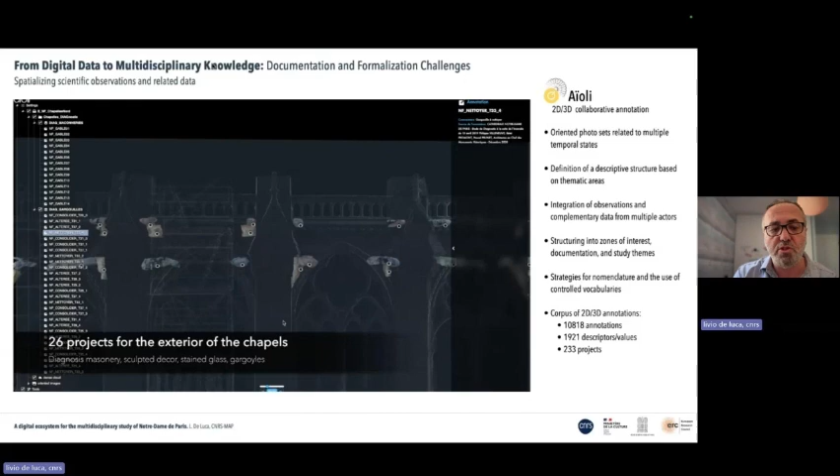This enabled us to use tens of thousands of spatially organized photographs representing multiple temporal states and integrate observations from various researchers, while focusing on nomenclature and controlled vocabulary issues.

The annotation corpus today includes more than 10,000 annotations within more than 230 projects, available on the web in a collaborative platform.

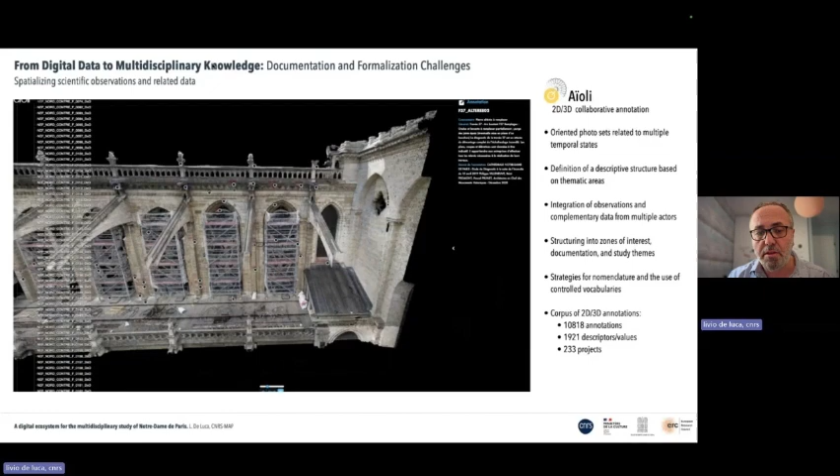A major effort was the digital translation of the diagnostic assessment conducted by the project management team for the architects in charge of the restoration, covering the exterior and the interior of the cathedral that you are seeing on the screen now.

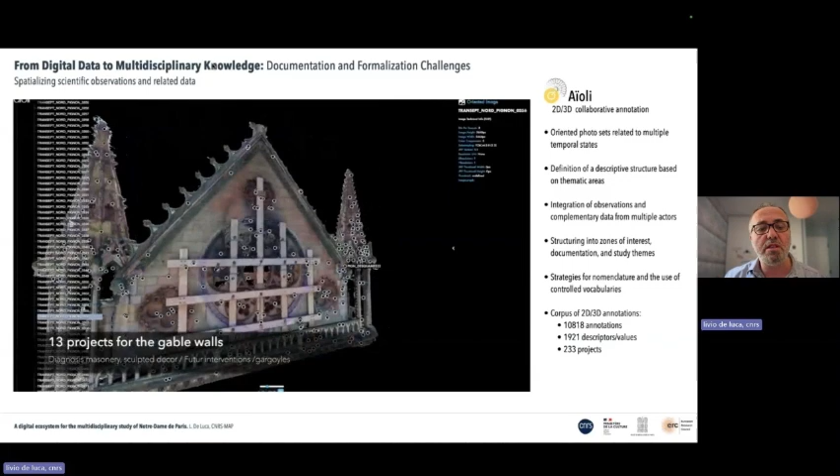All the annotations and data include the identification and analysis of deterioration patterns or weathering phenomena, descriptions of previous restorations, the decoration, the stained glass windows, instrumental measurements such as radar analysis and stratigraphies, and the proposed interventions promoted by the architects.

So on the initial descriptive layer of the entire cathedral, additional study and description layers from scientific projects have been gradually added. These projects advance in parallel and cover overlapping aspects, as you can see.

This includes the repertoire of lapidary marks, more than 1,000 lapidary marks memorized by the emotions working group, the remains of polychromy on the portals, the location of timber remains after the fire, the precise locations of studied wooden elements, and additionally hundreds of annotations on the lead joints of the high windows, and on the staples of the gutter walls by the metal working group, have been integrated.

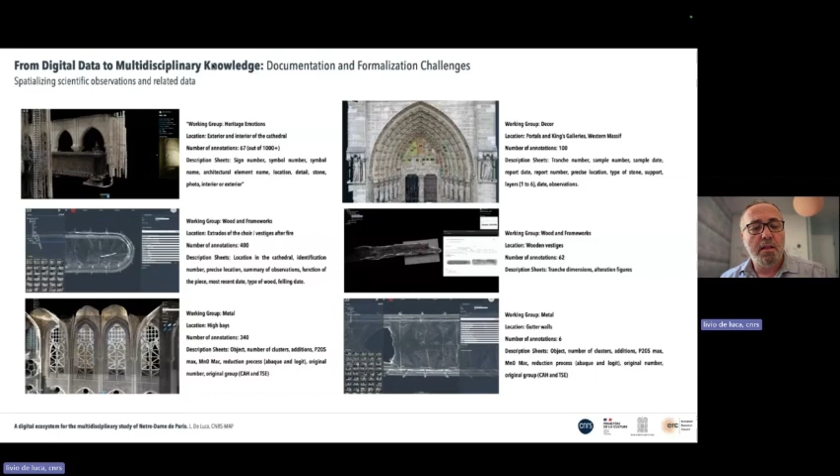To clarify the scientific significance of our current and future works until 2027, you can consider just these single photographs on the screen.

Along with all the branches visualized by explicating layers of observations and interpretation on the same portion of physical space, these layers manifest through concepts, descriptive attributes, vocabulary terms, and study protocols, the way in which several disciplines look at the same objects.

You can easily understand that one single image can be the starting point for multiple analyses and interpretations, giving us the possibility to explore and understand the richness and complexity of the multidisciplinary approaches.

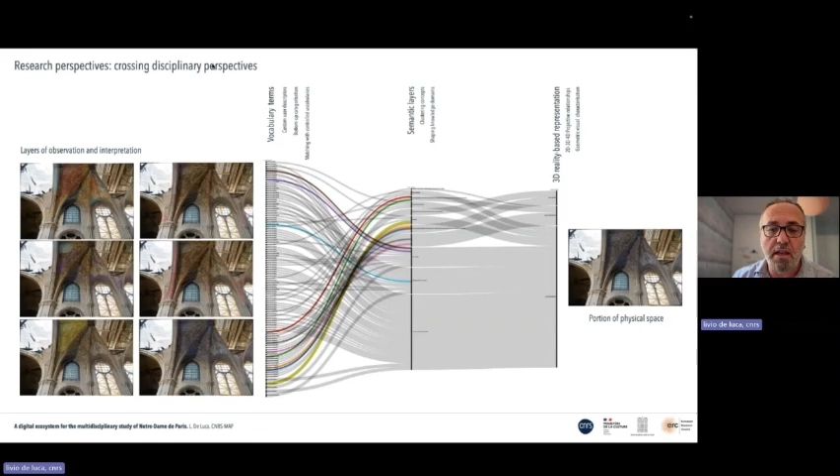This illustrates, in my opinion, the analytical challenge of this new data territory, which, while focused on a single monument, Notre-Dame, could extend to other material and knowledge objects.

We have over 3 years of research now to explore this new scientific matter, aiming to materialize and associate this cathedral of knowledge with the physical cathedral through digital approaches.